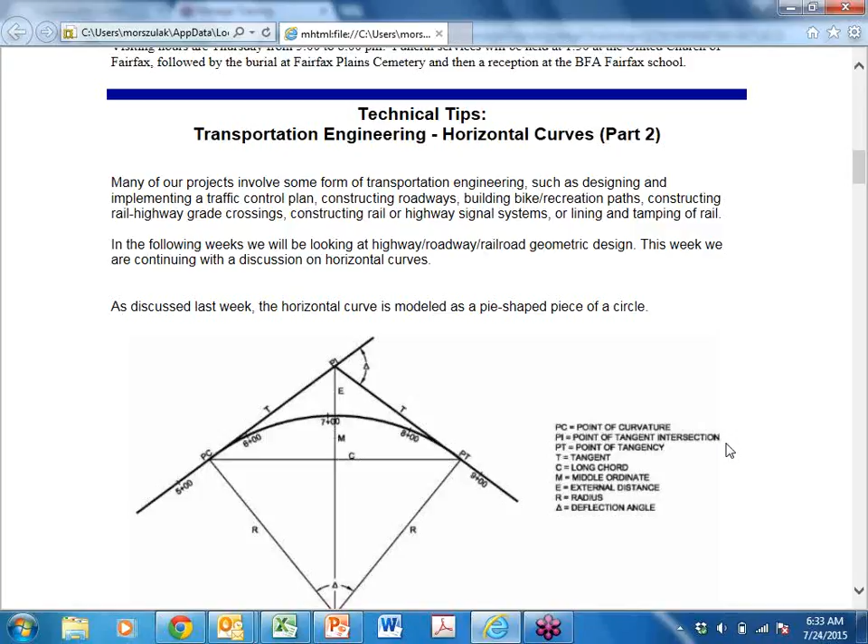This is the second part. We're going to talk about the horizontal curves. There's a lot to it, as I mentioned before. And here it is, it's basically a piece of pie, right? We talked about the point of curvature, the PI, and the PT, and how these tangents come together at the PI and then form a curve. And from there we have a radius of the curve.

From the center point, it's the center point of the circle. We have a chord length, which goes across from the PC to the PT. There's the middle ordinate, which is that distance from the chord out to the circle. And then there's an external distance to get to that PI. All these things are important, and this delta angle, which is the angle between the two straight lines, or the tangents.

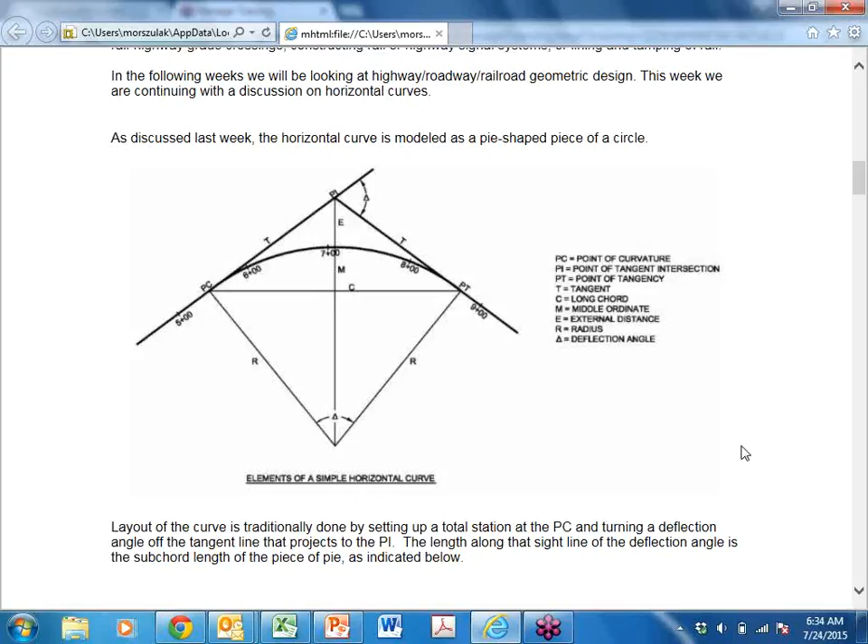So we're just going to talk about the layout of the curve. What's normally done, traditionally what's done, is the surveyor sets up on the PC. He shoots the line out to the PI, so he follows the line he's on with his instrument, and then he turns an angle to a point and measures out a distance off his survey instrument. And then he turns it again and takes another distance off a different angle, and then turns it again, and eventually lays out that curve.

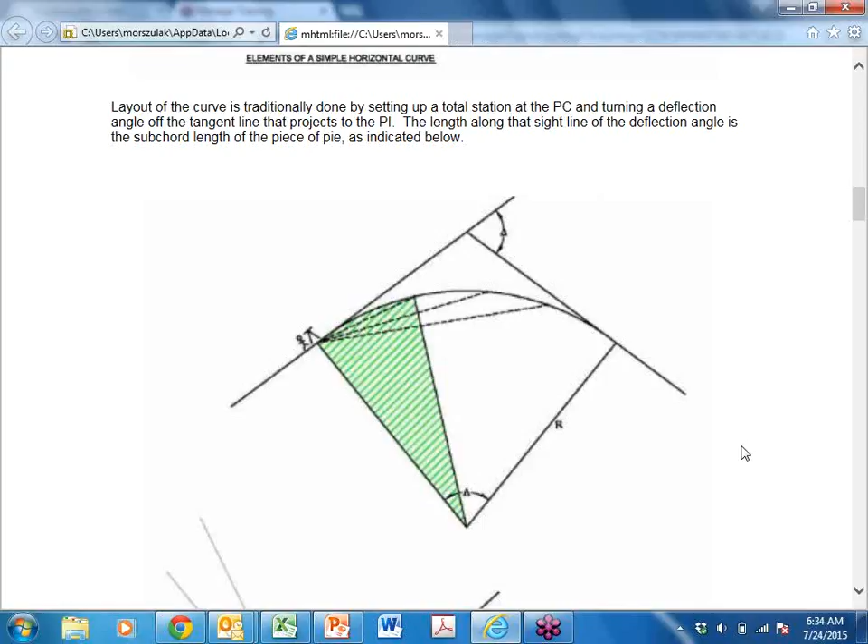In this next illustration, this piece of wedge here is shown here. It doesn't really show up on the same image on the screen.

You look at it in terms of these little pie wedges. If you go out a distance, say one station number or to the next nearest station number, you'll turn an angle down here. Mike Twomley, setting up his instrument, would turn that delta angle equal to half of that angle. You have to compute all this, and the way to do it is calculate that subchord.

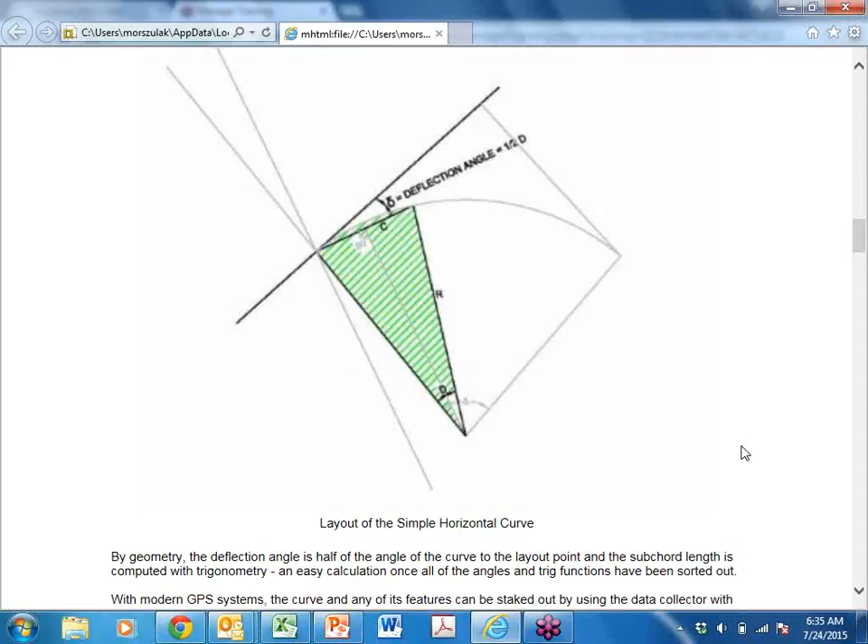So instead of the chord going all the way across, it's a subchord, but it still has the same radius. You have to sort out all the information, and computers will do it easily nowadays. By geometry, you figure out the deflection angle, and then you compute that chord length. It's all computed by trigonometry and geometry.

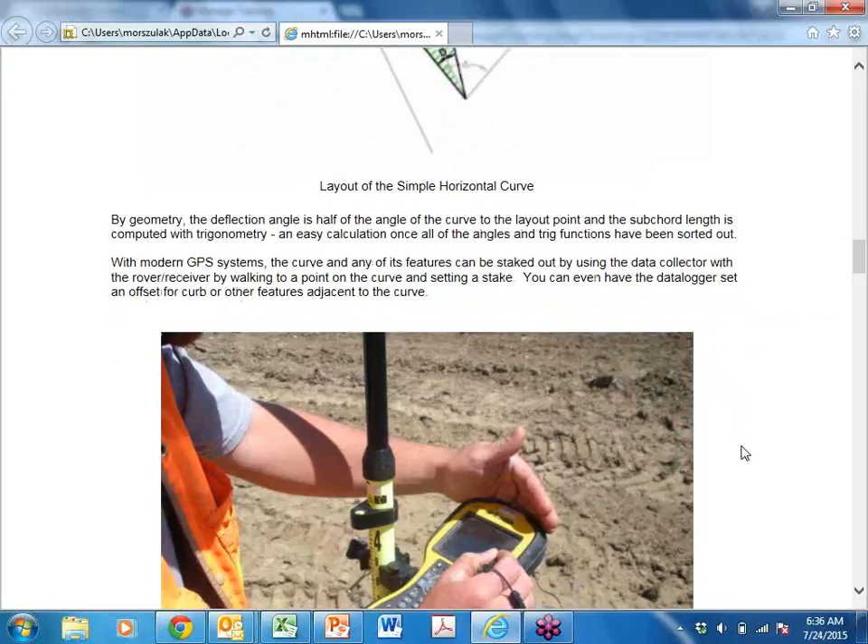It's an easy calculation, as I'm saying here. Once you get everything sorted out, it's getting everything sorted out that's the challenge, unless you have it all programmed into a computer. But Mike Twomley and Ryan here, these guys cheat nowadays, okay?

The really challenging thing about horizontal curves, nowadays we use, a lot of times, GPS systems. Curves can be staked out just by taking the data collector and the rover receiver and going around, looking on the screen to see where that curve line is, and putting your stake right there. It's quite a bit simpler, but the ideas and understanding still has to be there. Mike and his guys know all that and understand how it's done and what they're doing. It's not just going to a line and plopping in a stake.

We also have some machine-controlled GPS equipment, like in this case, either a grader or a dozer blade, where it does all the work for you. You don't even have to really stake things out. That takes the information from the model called the TIN, which tells the blade, based on its position on the ground, what elevation it should be at, so it tries to grade to that elevation or fill to that elevation.

I'm going to talk about the St. Johnsbury-Lyndonville project. That's a multiple grade crossing project as part of a paving project, and Pike is the general contractor. We're working for them. We have five grade crossings at different locations. The first one was completed on Broad Street in Lyndonville, on Route 5. It's a relatively busy roadway, but fortunately for the guys, they closed the road off so traffic could get detoured around, which made it a lot simpler to do.

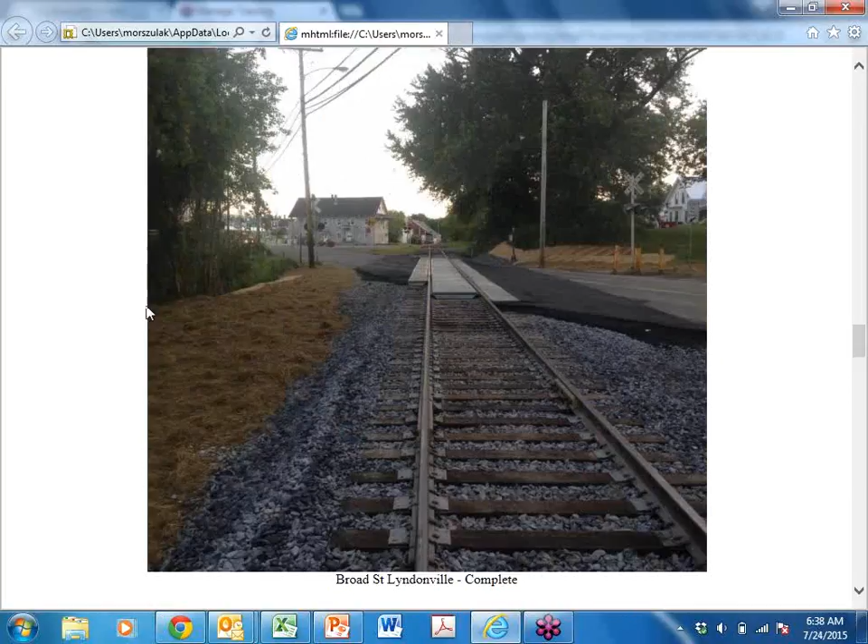So there's the final crossing. I don't know, maybe the road is still shut down there, Gene, do you think? No, it's open. Pike just hasn't done the final paving up to it yet. But as far as no traffic, I said it's a very busy roadway and it looks like there's no traffic up there, but there is.

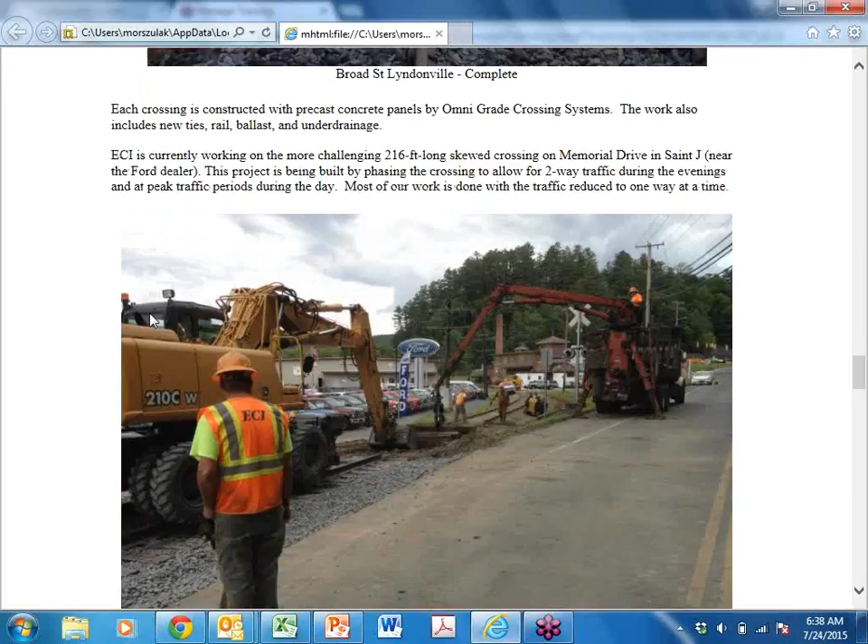Each crossing is constructed with precast concrete panels by the Omni Grade Crossing Systems, and the work includes new ties, rail, ballast, under drainages, and some other work.

We're currently working on a more challenging and much longer, 216-foot skewed crossing on Memorial Drive in Saint J, near the Ford dealer. You can actually see the Ford dealer. That split, that Y in the road, brings you down to downtown Saint J versus going up on top of the hill by going straight. This crossing is long, skewed, and very busy.

Unfortunately, this one, we don't have the luxury of closing off traffic. So we had to phase all the work to allow traffic to pass during the day, and then get back to two-way traffic in the evenings and during rush hour.

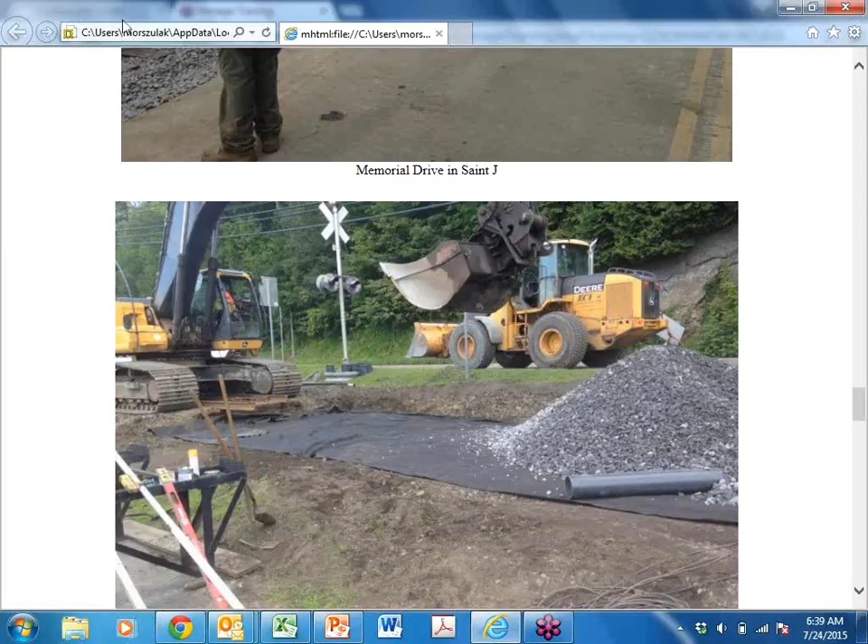Of course, that long skew still has a lot of track work off from the actual roadway because the panels extend beyond the pavement at that skewed length.

Other crossings are Old Center Road, Mill Street, Concord Ave, and Saint J.

Well, I left a little note. I said that rumors that large trophy trout are frequently caught in Passumpsic nearby are untrue, and I advise you not to waste your time fishing there, okay? And I assume that nobody looked at that link, right? Okay, I'm glad.

4 free tickets. Alberta, nice, good, 3rd responder. So there you go. I know that there were some other responses. If you're looking for others to go with you, Rob wanted to go for one. I think he sent me a text later. I think that Ken, Pelosi, and let's see, was it Ken and Matt, and then you and Rob, and might have been one other later. So I'm sure you could find some friends today. Rob, you're probably out of luck. Yeah, no, that's okay, I just knew that she can go. You're probably the driver though, you probably drive everybody down and drop them off, bring them home and back.

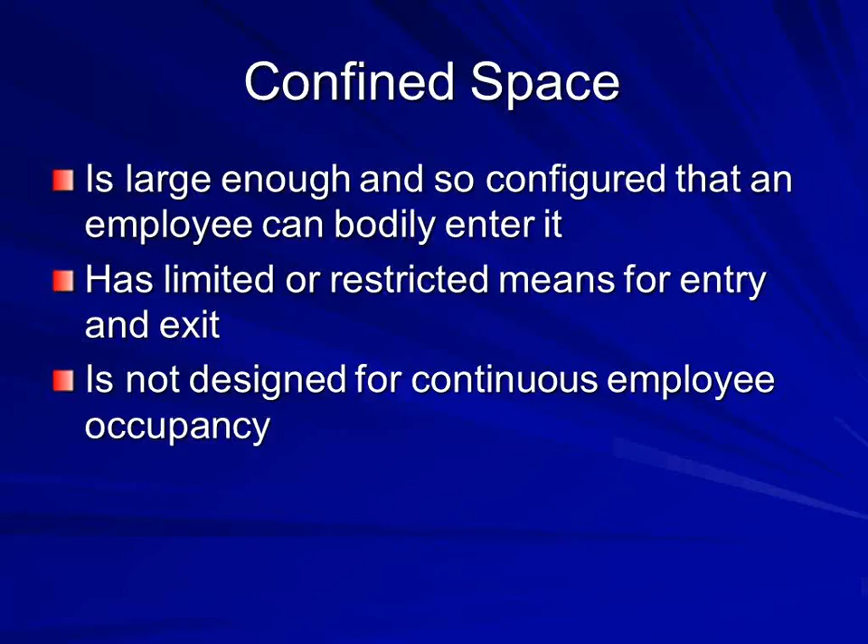So the biggest thing is confined space. What is it? The definition of confined space: it's large enough so someone can bodily enter and perform work. It has limited or restricted means of entry and exit, and is not designed for continuous employee or human occupancy. They also give us some ideas, saying manholes, sewer, storm drain, electrical, communication, or any other type of utility manhole would be considered confined space.

Any tanks, fuel, chemical, water, or other solid, liquid, or gas tanks would be considered a confined space. And then precast concrete and other preformed manholes, drill shafts, or any type of casings can also be considered a confined space. So the biggest thing with this new regulation change is we just need to make sure we can all identify what a confined space is.

And no employee is authorized to go in a confined space unless they've had training. This training that we're doing now kind of puts us into that training category where we're all trained and can identify what a confined space is.

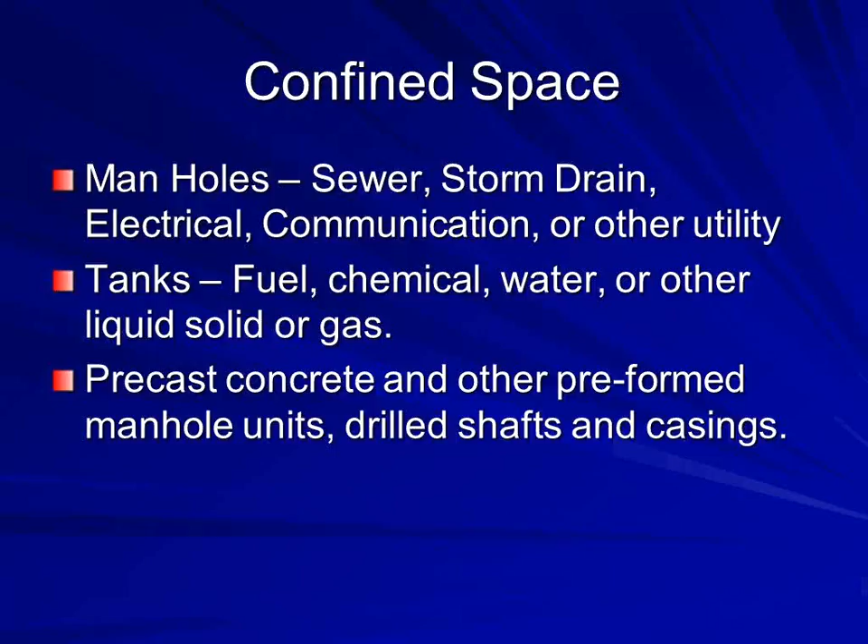But another great thing about our tailboard is we have a confined space line. It doesn't hurt for you guys, if you're going to do confined space work, to say Matt or Alberta's coming and taking care of confined spaces. You actually list what the confined space is — if it's a sewer manhole, an electrical vault, a catch basin, a wastewater tank — throw that on the tailboard, because then you've identified your confined space in the project.

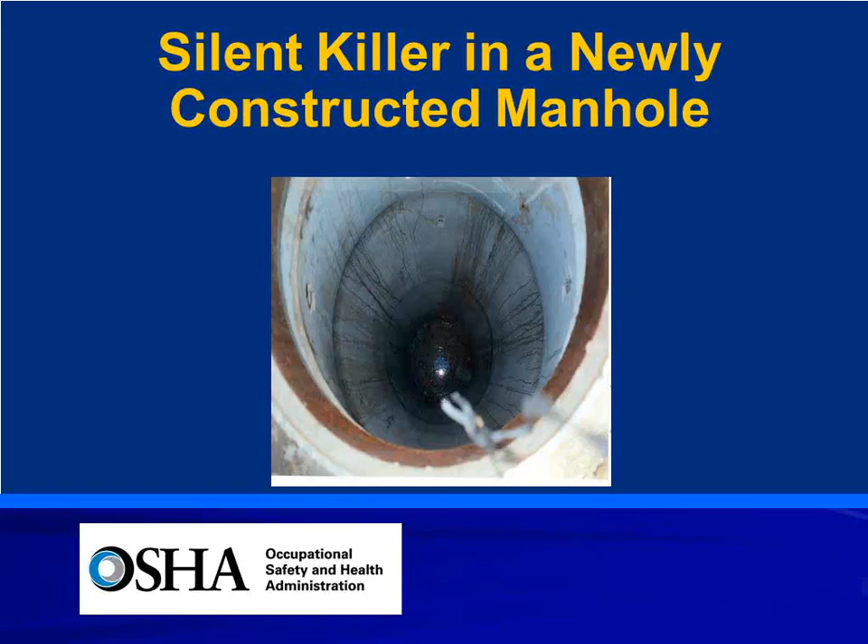One of the reasons why this has really come to the forefront is there's been a lot of fatalities in the United States about people going into brand new sewer structures performing vacuum tests. So here's a case study, and I thought it was very interesting. It gets you thinking about the fear of the unknown and things we kind of take for granted.

OSHA received notification of a construction site fatality on August 5th, back in 2004, following the day of the incident. It was reported that the employee was found at the bottom of the manhole. There was a new sewer system under construction.

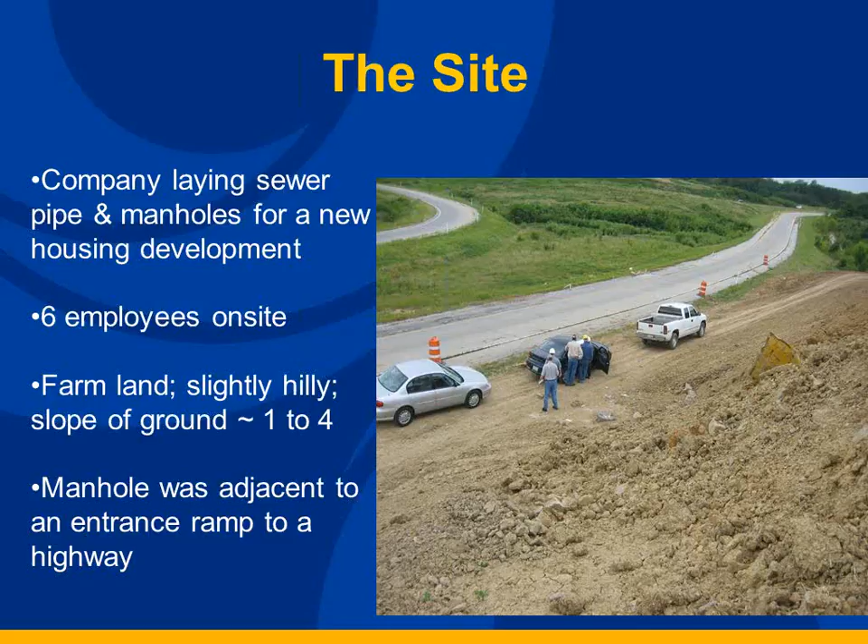The site was laying sewer pipe and manholes for a new housing development, something we do very frequently here at ECI. There were 6 employees on site. It was kind of farmland, slightly hilly. The manhole was adjacent to the entrance ramp of a highway.

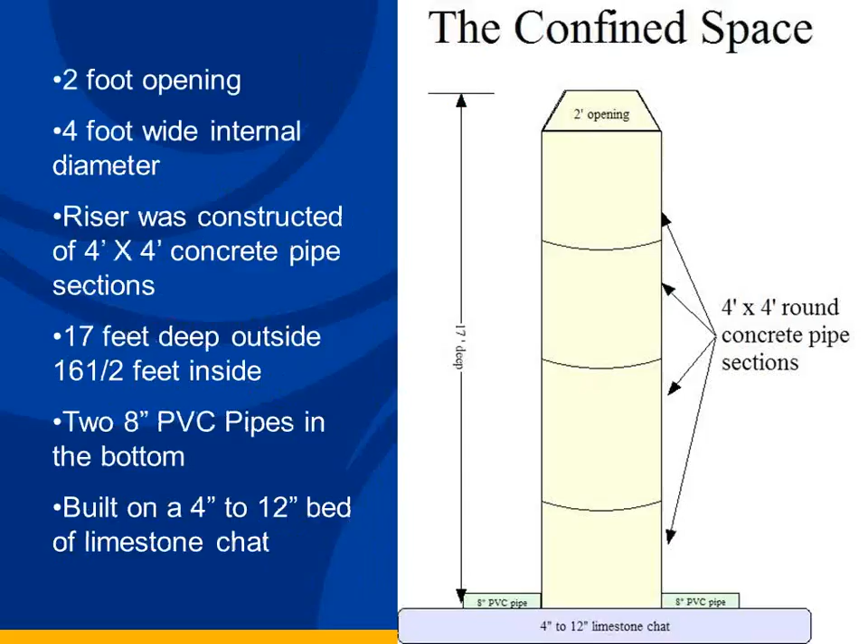What happened is they were doing a vacuum test on the structure, something we do very frequently here, and the vacuum test failed. So when a vacuum test fails, what do we usually have to do? Try to figure out grouting any seams or anything like that, try to make the sealant better so we can pass that vacuum test.

So as the vacuum test is sucking all the air out, the soil was a limestone type of soil, which has a carbon dioxide characteristic to it. So as they're sucking the manhole air, carbon dioxide, an inert gas, was displacing oxygen and filling up the structure.

So when an employee went down and entered, there was oxygen deficiency, meaning a lack of oxygen in that space. The employee went down with about 10 to 11% oxygen in that space, when our bodies need somewhere between 19.5 to 23.5% oxygen to function. So he went down, worked for maybe 5 or 6 seconds, got lightheaded and dizzy, and then became unconscious. There wasn't enough oxygen to breathe.

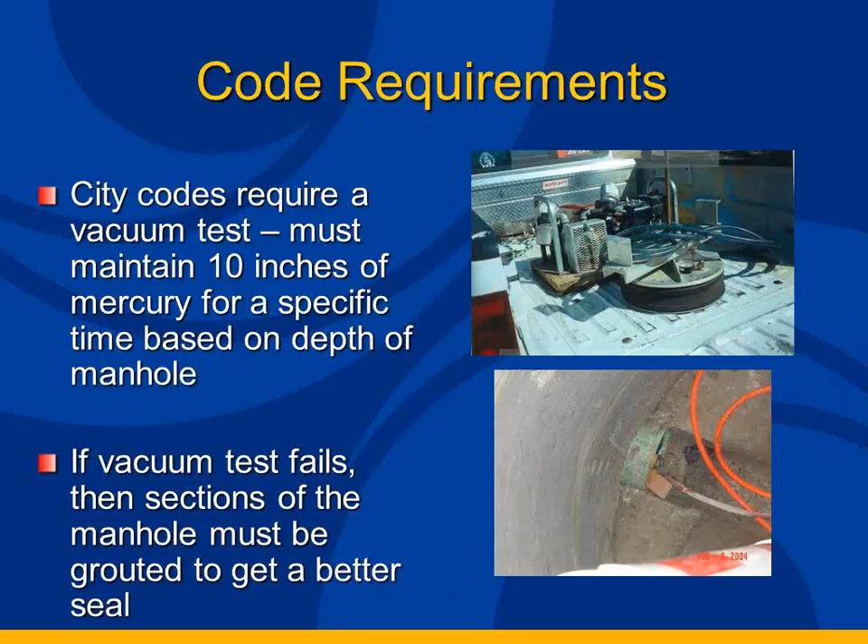The grout was done, the employee was working alone, and the employee was found at the bottom of the manhole unconscious.

The biggest thing is these spaces are like a silent killer. We have no idea what the atmospheric hazards are. They were doing air monitoring after they got the employee out, and they still had an oxygen deficiency — it was 16.3 and 17% oxygen.

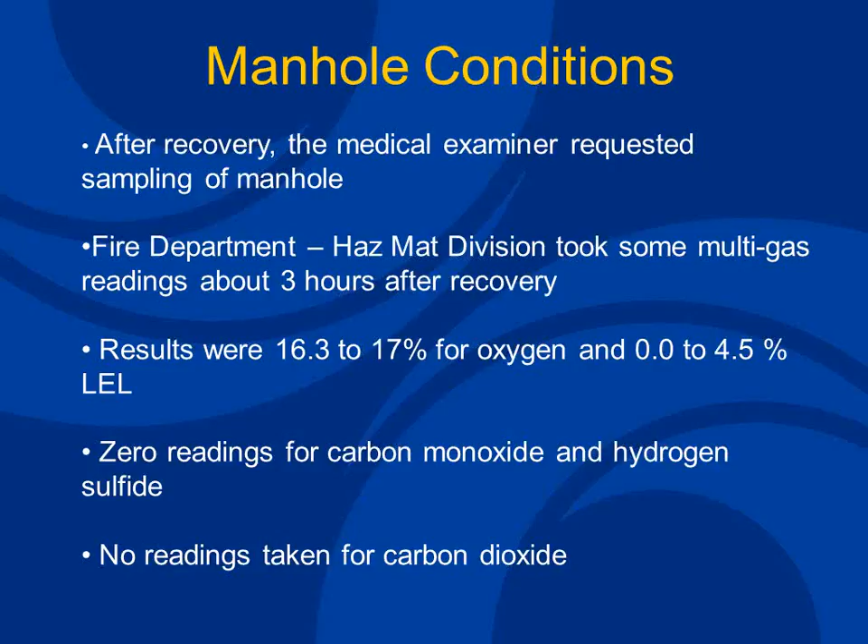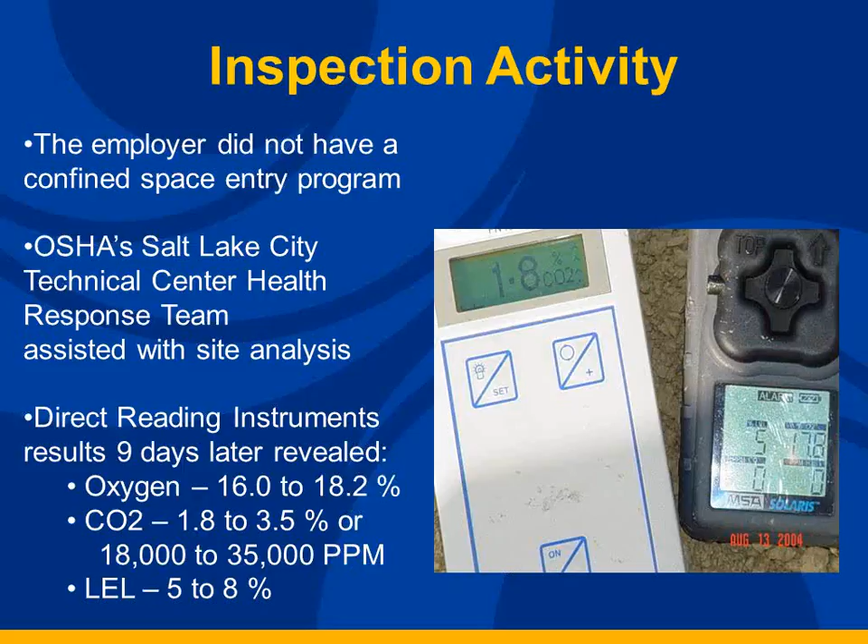Here's some more readings. They had a little bit of carbon dioxide, and then there were high levels of LEL, which I was shocked at, 5 to 8%. Again, when we go into these spaces, it's very important that we always check air quality before we enter, because we do not want to put an employee in any space when there's a potential hazard such as oxygen deficiency, carbon monoxide, LEL, or hydrogen sulfide.

They did the same thing again, and they found out after they did a vacuum test, they were at about 12.5 to 14% oxygen. That's just not enough for us to be in a space, especially if you're working — it's a very fatal situation.

And again, you don't know. You look down into this space and you think everything's fine. You have no idea until you go down there, and then you really start to panic.

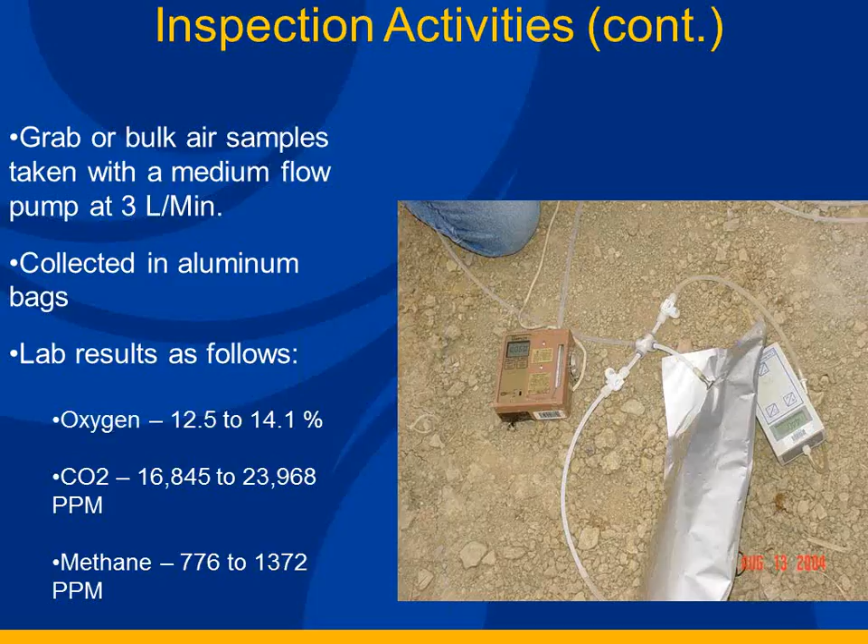Carbon dioxide is a colorless, odorless gas that displaces oxygen, leading to oxygen deficiency. It's a special problem in the Midwest — limestone rock, acid topsoils, acid leaches from the soil, which then contacts the limestone, producing carbon dioxide. That's kind of how it breaks down.

There have been numerous fatalities, especially with new sewer vault leak testing using vacuums pulls carbon dioxide into the space. Oxygen measures less than 3% in similar fatalities. There's been quite a bit of this, more common in the Midwest, but again, you just never know.

When I saw this, I was just like, wow, we do this all the time. And we sometimes have to go in and tighten some things, work on some joints, and you never know. That's why it's so important that you don't take it for granted — each time you come in and out of a space, let's check.

Let's check the oxygen levels. Let's be sure we know that this space we're going into is safe. We probably have one of the best confined space programs, and everybody's up to speed on it. But it's just a good refresher for us not to take that shortcut and go in to grab something in that space.

Because you just never know what could be lying in that manhole. Any questions? That's all I have. Thanks for your time. I'll tell my hazardous atmosphere story.

Maybe you've heard it before. It wasn't a confined space, but I was on the Central Artery Project back in the 90s. There was a building called Turner Seafood, a seafood processing building right next to the big excavation. There was some ground movement, so we had to go inside the building. My project engineer brought me in, and we were on the wastewater side of the building.

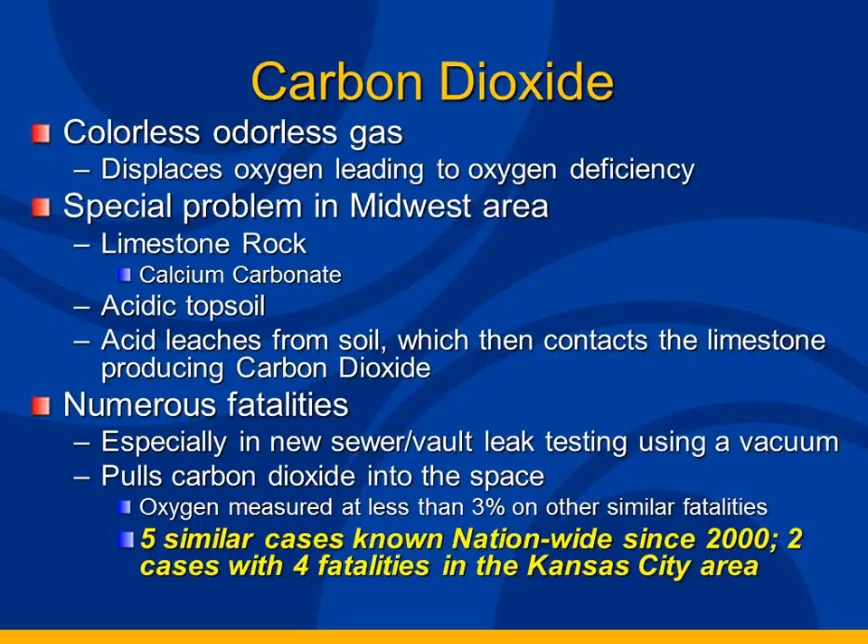This is like the state of Vermont needs to know all our health insurance status and everything. So do we have enough pens? I figured there was some over there. All right, so no one gets out the door. Sarah's gonna hold your paycheck until these are turned in. How about that?

You gotta fill them out. Yeah, we should have put it up on the screen maybe. I didn't make a copy. I can scan it, yeah, I can send it by email if you want. Yeah, we'll just scan it real quick. Watch, we'll put it right up on the screen.